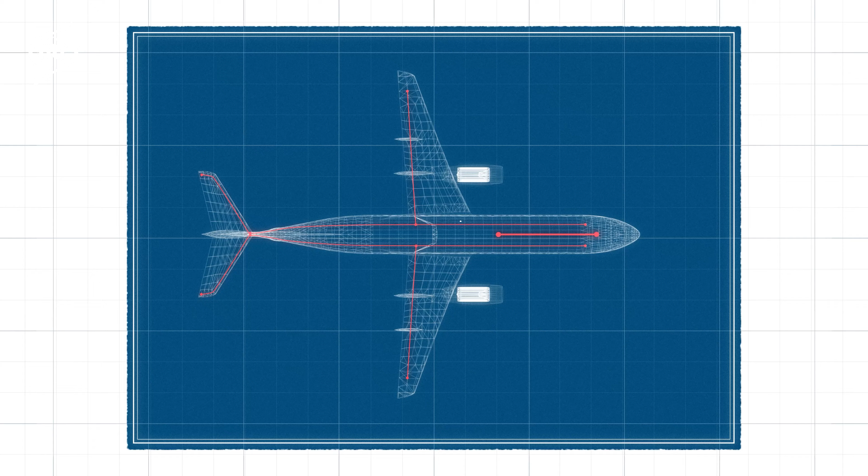To reach net zero carbon emissions, the aviation industry is transitioning towards more electric and connected aircraft. One of the biggest challenges is the weight and complexity of the onboard wiring and power systems. The Horizon 2020 ADENEAS project has tackled this task by introducing wireless and powerline communication technologies, alongside advancements in cooling systems and power electronics. These new technologies significantly reduce the weight of the power and data networks in aircraft.

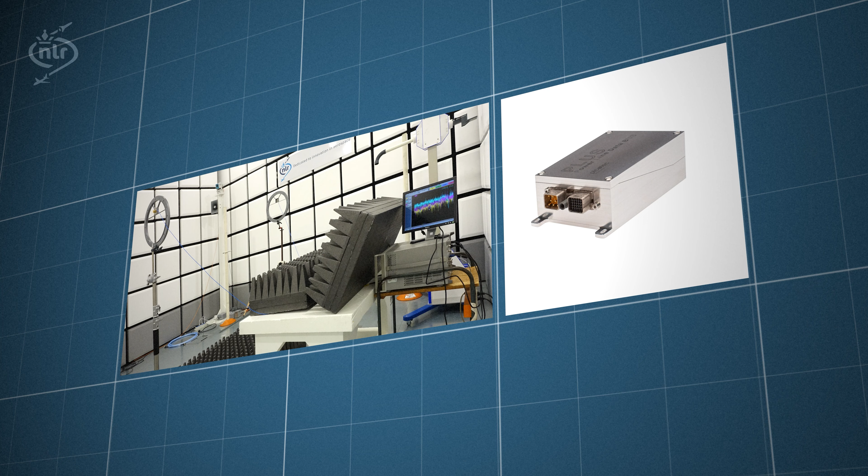The ADENEAS concept employs a hybrid data network in which wiring is complemented with powerline communication and wireless communication. The most prominent challenges that wireless communication face are reliability and network capacity. ADENEAS has aimed to reach the same level of reliability as a wired communication system by carefully trading off various technological solutions.

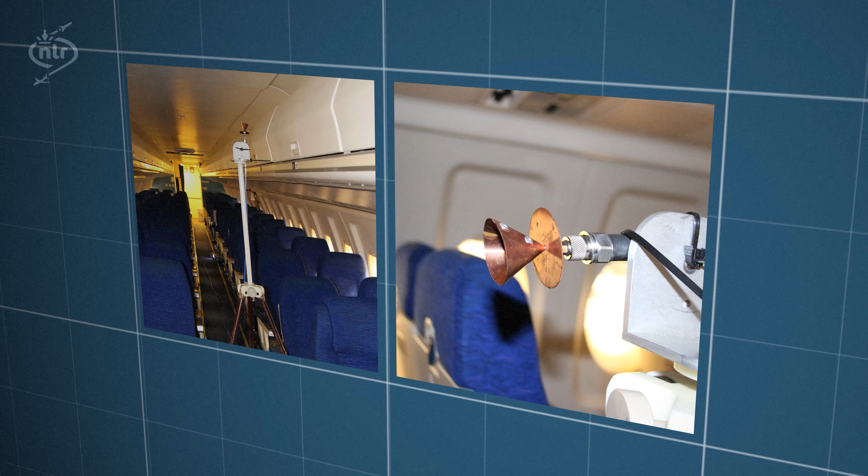Through testing and simulation, we have optimized the capacity and range of the wireless network and studied how the signals bounce around within a given space. Certain radio frequencies interfere with critical aircraft systems, such as the radio altimeter, which might cause unwanted risk. We investigated solutions to minimize this interference, like shielded passenger windows.

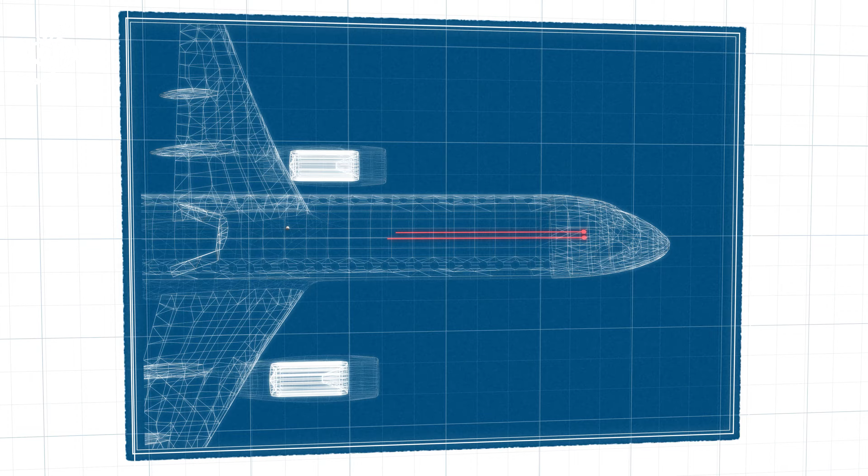Besides minimizing wiring through wireless communications, we can further reduce weight by transferring data via the powerline cables. The need for extra data cables will therefore be eliminated. This is called powerline communication. Powerline communication uses power cables to transfer the data and can be used for equipment that is already connected to

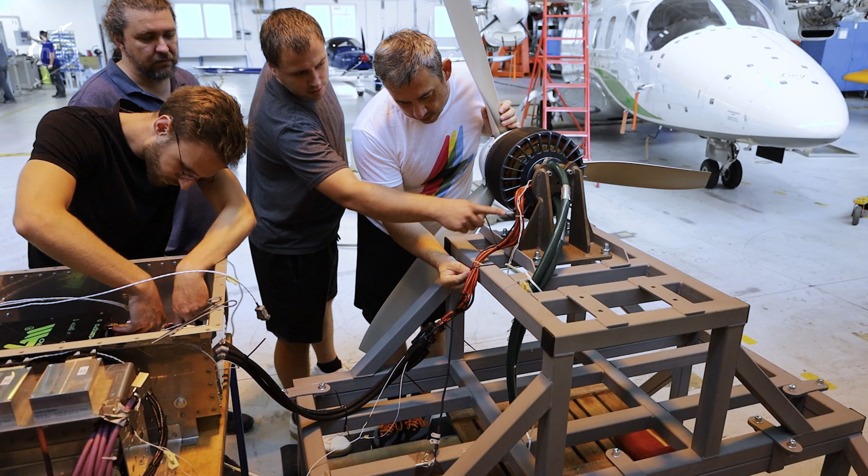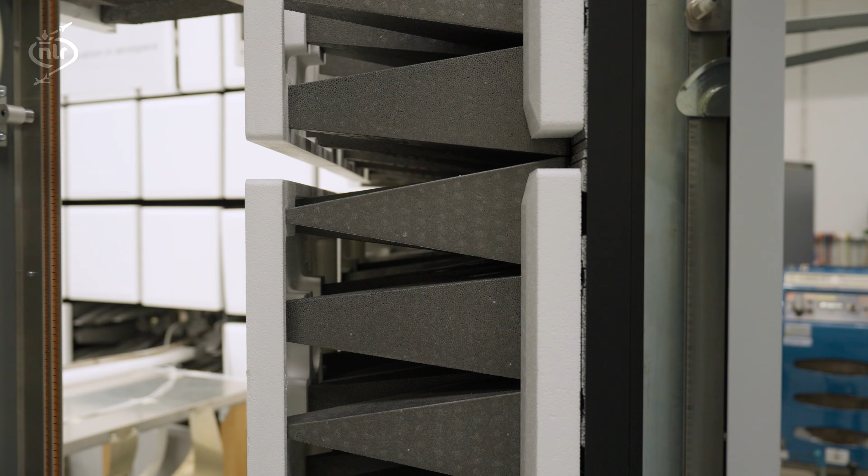this power network. ADENEAS performed comprehensive testing to make sure this system will not interfere with other electronic systems. This is done in NLR's electromagnetic compatibility facility and in a test aircraft, the Evektor SportStar EPOS.

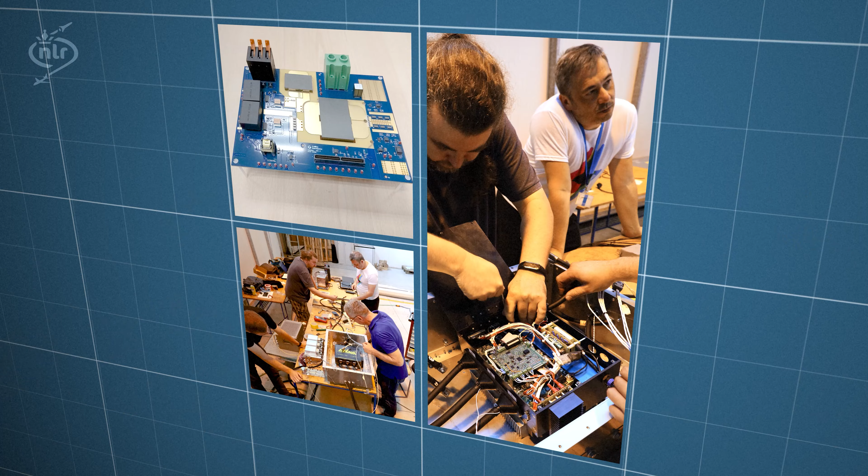To improve the efficiency and effectiveness of the power network, ADENEAS has focused on modular power electronics. Together with new hardware development, this makes it possible to use smaller and more efficient power converters that provide power to corresponding devices when needed. As a result, there is a substantial weight reduction.

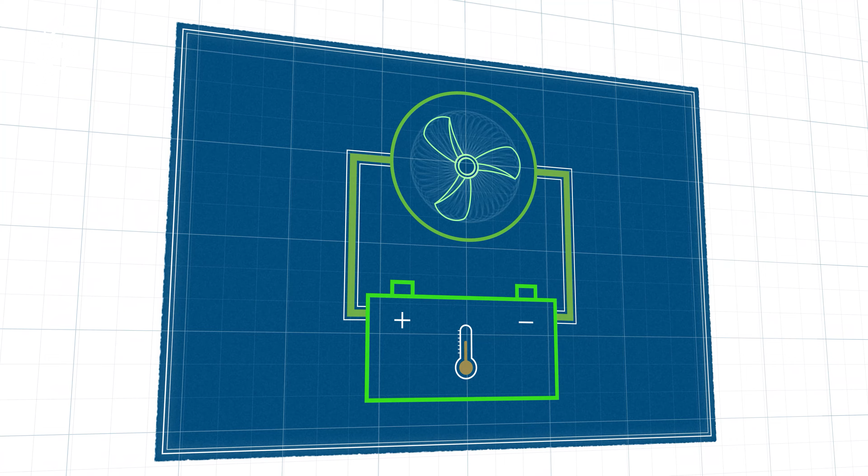More electric aircraft produce a lot of excess heat from their power electronics. Therefore, ADENEAS also needed to come up with a cooling system to combat this matter. We designed a lightweight two-phase cooling solution. This solution takes advantage of evaporating cooling fluids, making them very efficient in terms of volume and weight.

By means of nanofeatures on the cooling channel wall, the heat transfer of the total cooling system can be further improved. The resulting cooling system is flexible and modular, hence can be adapted to any aircraft scenario. The performance of the overall system has been tested and validated in a specialized thermal lab.

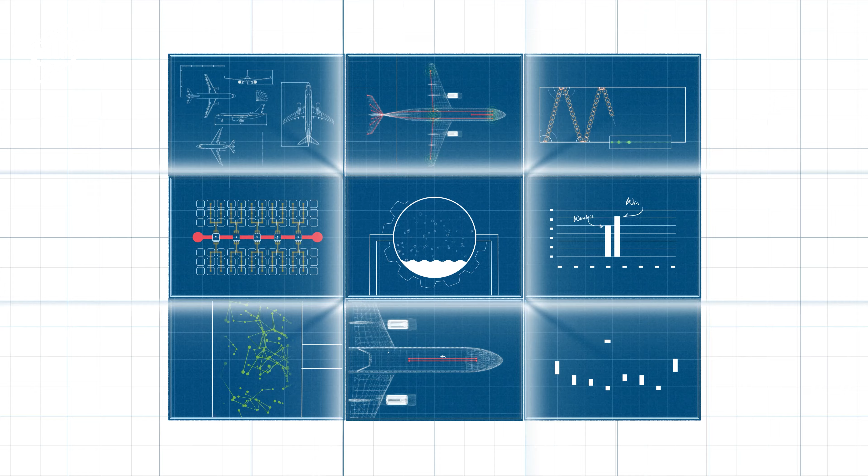The Horizon 2020 ADENEAS project has proposed a safe and optimized power and data network that is scalable to various aircraft sizes. All technologies are seamlessly merged within an automated, streamlined and efficient design process. Furthermore, ongoing efforts are being made towards certification and standardization.

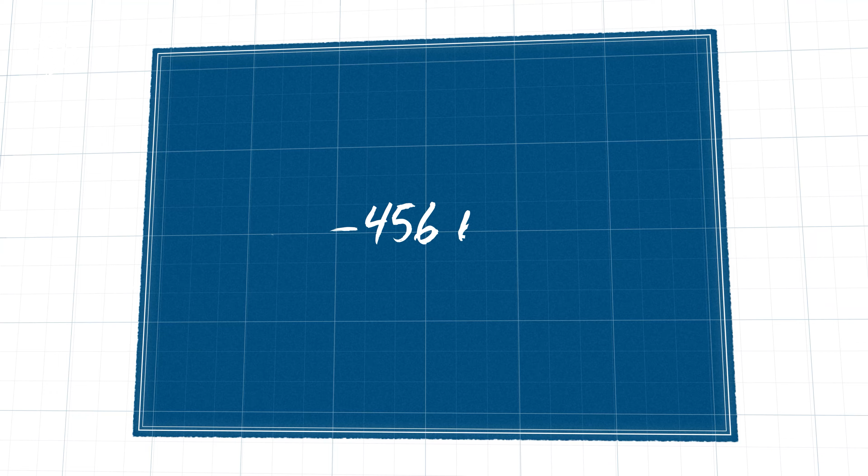ADENEAS technologies deliver a 456 kilogram weight reduction for a standard 120-seat aircraft, resulting in a 334 kilogram decrease in CO2 emissions per flight over 4,000 kilometers, advancing sustainable aviation.